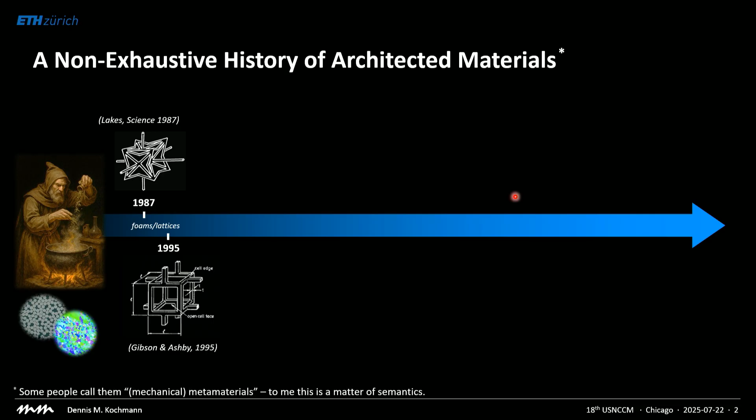But about 30 years ago, there was an interest that came up in using structure to design materials with interesting properties. One of the early examples was the design of cellular structures that have a negative Poisson's ratio. Soon after, there was a lot of work in foams and lattices using structure to give interesting effective properties at the macroscopic material scale. And then something interesting happened, and that is manufacturing took over.

All of a sudden, advanced manufacturing and 3D printing enabled everyone to produce pretty much whatever structure you want. And now, all of a sudden, manufacturing was in the driver's seat to make interesting structures that buckle, that compress, that actuate, that do all kinds of things. Soon after, miniaturization set in. With the advent of two-photon lithography, you could make structures smaller and smaller. You could go to interesting new behavior, pentamode materials that behave like a fluid with almost no shear stiffness.

You can make hierarchical structures. You can make structures across many different scales, designing them from nano to macro. And this continues until today. And so in this case, manufacturing has enabled our community of mechanics and materials to produce all kinds of interesting small-scale structures. Why does this matter?

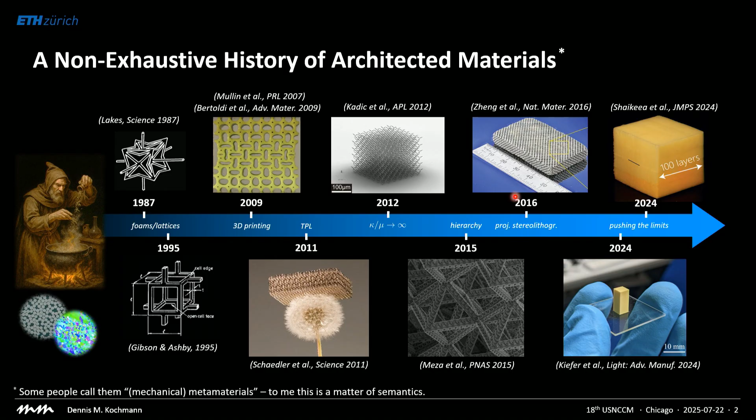Well, if you think about classical materials, they get their properties from composition and microstructure, and we all know exactly how this works. And so if you test these materials, you get properties, stress-strain behavior, or effective elastic properties, elastic surface in different directions. And what we as engineers, as scientists, try to understand is the structure-property relationship. And this, many of us do on a daily basis.

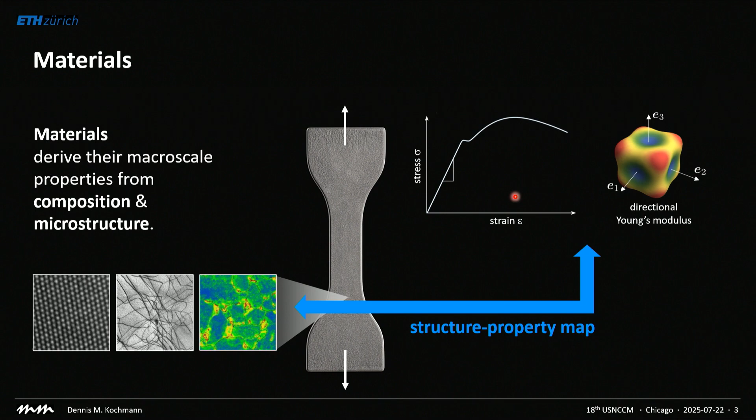There's nothing fancy here. When you turn to architected materials, you introduce one more level. And this level in the middle has structure. And so this structure is literally a structure, which means if you zoom in, you find plates, beams, shells, something that we can describe with structural mechanics. And all of a sudden, the main relation that we're trying to understand is how to go from this structure to the macroscopic properties.

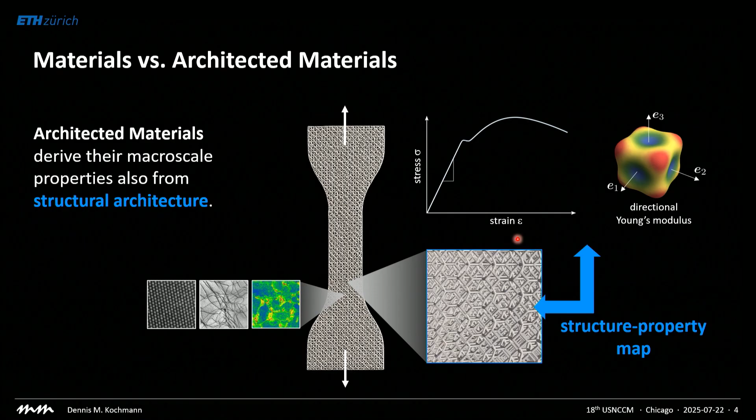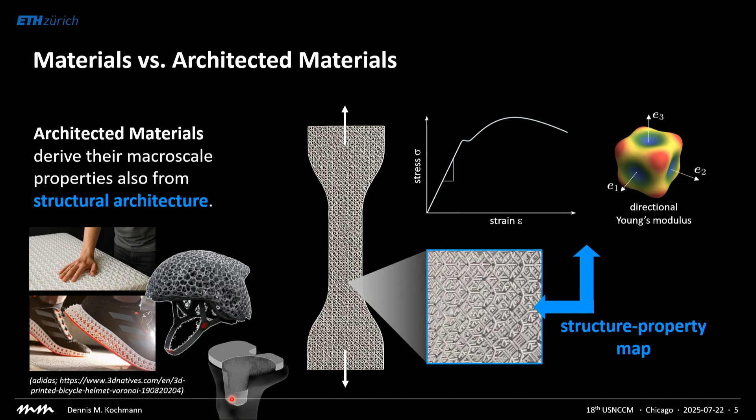Of course, the whole thing is still made out of an actual material by the end of the day. But once you know the base material properties, and these we can characterize relatively easily based on dog bone specimens, it's a structure that determines the ultimate properties. And this is what we're trying to understand. Of course, this happens not only at the smallest scale, you can also use this across scales. There are mattresses nowadays, there are fancy shoe soles, personal gear, bone implants, whatnot. All of these use structure to give you the properties that you need and you want in engineering applications.

So why is this interesting for us as a computational mechanics community? Let's try to put the second C into the USNCCM, we're the computational mechanics crowd. On the one hand, there's a huge challenge that tries to understand what I call the forward challenge, which is, given a certain microstructure, what are the effective properties? And this is something we can try to cover and to cope with our classical computational techniques, trying to understand what the properties are. The second challenge goes the other way around.

And the second challenge tries to understand the inverse, which means if you come to me with a certain set of properties that you want, or a combination of properties, how do we make structures that have exactly those properties? And I would argue the second challenge is even much harder than the first, and I will explain why. We as a computational mechanics community, of course, have a huge set of tools that we can use here, both for the forward and the inverse. And I'd like to talk in the next 35 minutes or so about these two challenges. And I'll start with the forward challenge. Given a structure, what are the properties?

Of course, this is not new. This is something we've been doing for decades, modeling structures, understanding properties. Sometimes it turns out that some of the techniques we have can actually be applied here much more efficiently than elsewhere. And I'll give you a simple example. Homogenization by FE square has been around since the beginning of the 2000s. And FE square is something that's relatively simple. You solve a macroscale problem with finite elements, and whenever you need a constitutive response, you solve a nested microscale problem and you pass information back and forth.

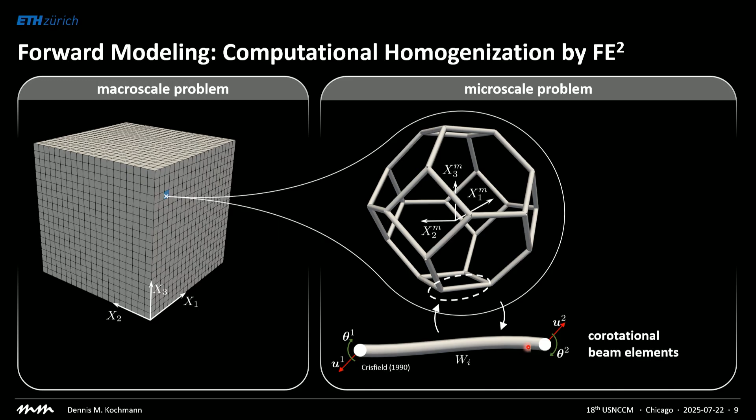It's a great technique, but hardly anyone uses this. Why? Because it's extremely expensive. This is expensive from an execution point of view and also from a storage point of view. But if you talk about architected materials like these ones, it all of a sudden becomes feasible. On the macro scale, what we have is a macroscopic structure simulated by finite elements. On the small scale, I have a structure, which I can simulate, for example, by nonlinear beams. And now you can do FE square, but the nice thing is down here, especially when considering periodicity, you have a very small number of degrees of freedom, and this makes it readily available.

So what we do now is if the macro scale deforms, and this is described, for example, by a displacement field, and we also throw in a rotation field, I'll explain why in a second, you pass those and the gradients down to the small scale, you deform the unit cell accordingly, and then, using periodic boundary conditions, you figure out what is, for example, the strain energy density in elasticity. If it's inelastic, you use an incremental potential. We can differentiate this energy with respect to whatever we pass down. This we pass back as the stresses. We can even compute a consistent tangent.

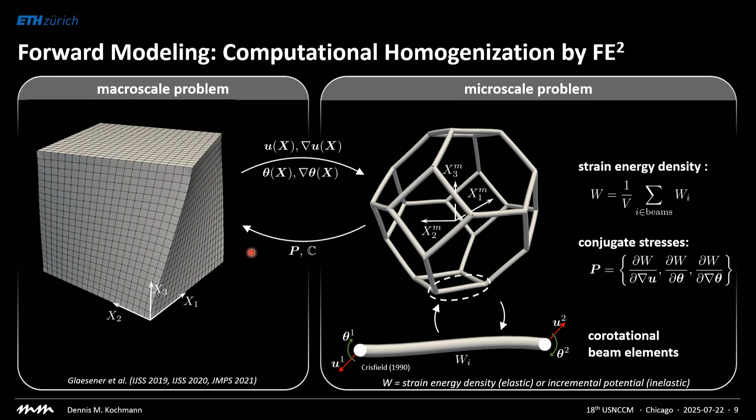But this is feasible. It's relatively easy because the number of degrees of freedom on the small scale is so low compared to what we have if you mesh and actually solve an RVE. So this can be used instead of simulating a truss that has millions of beam elements and takes hours to compute on a server. You can run this in a few minutes on a laptop based on FE square. And this works, of course, not just for show and tell, but this also works for actual problems.

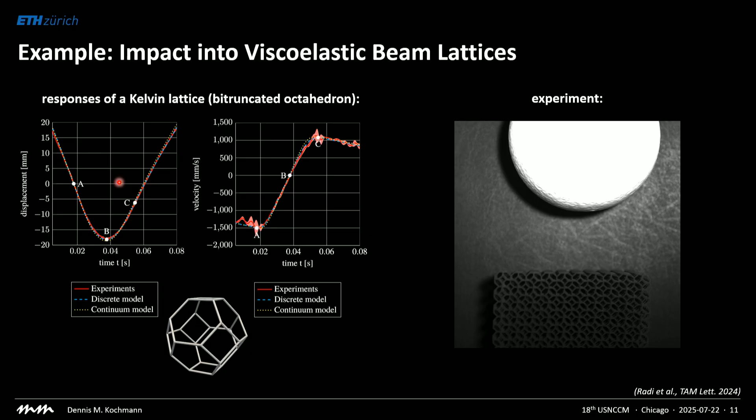Of course, homogenization doesn't work everywhere. If you have the case of failure, of localization, of inelasticity, in these cases I cannot homogenize anymore, it just doesn't work. Another almost trivial example is fracture. Fracture mechanics is more than 100 years old, and we understand what happens. There's a stress concentration at the crack tip, there's a singularity typically.

We've known this forever. But the moment that you put a discrete truss underneath, this doesn't work anymore, because now fracture toughness is not a continuum problem anymore. If you now apply loading remotely, and you look at the crack tip, you don't have a continuum. You don't have a singularity there because you have a discrete truss or frame. And now you have to look at which of these discrete structural members carries the maximum stress, and this determines fracture toughness.

If you want to simulate this for huge systems, especially in 3D, this becomes insanely expensive because you have to apply your loading remotely. If only we had a technique that has full resolution somewhere, but then efficiently coarse grains elsewhere. And of course, here we can borrow from atomistics, for example.

There's a technique called quasi-continuum, or QC, that was developed more than 20 years ago to have full atomistic resolution where you need it, adaptively tracking down, for example, dislocation events, but efficiently coarse graining elsewhere to gain efficiency. In atomistics, let's be honest, this is not a widely used technique because it only works at low temperature, only for crystalline solids. It has a lot of limitations. But for trusses, this works beautifully.

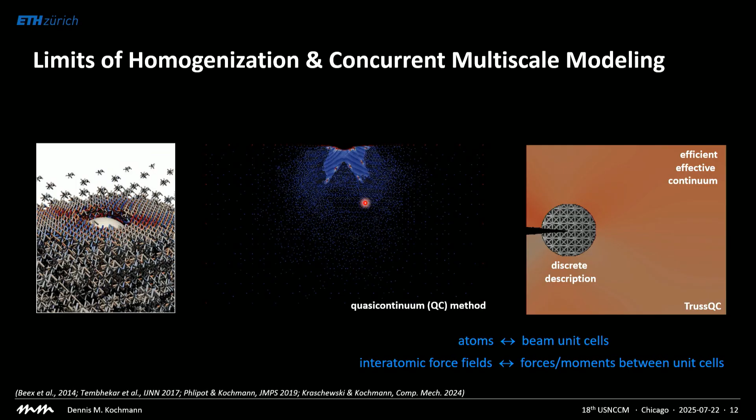So what we do is we retain full resolution at the tip. We efficiently coarse grain in a concurrent multiscale setting elsewhere. Instead of atoms, we have our beam unit cells. And instead of interatomic forces, we now have the forces and moments that are acting between these beams. And now you can coarse grain. So you have full resolution at the crack tip, and then you coarsen in many stages.

At the crack tip, every unit cell retains its degrees of freedom, and as you coarsen away, you interpolate using methods of finite elements all the degrees of freedom of a unit cell, and this allows you to tackle really large systems. Throw in adaptive remeshing. Our community knows exactly how this works.

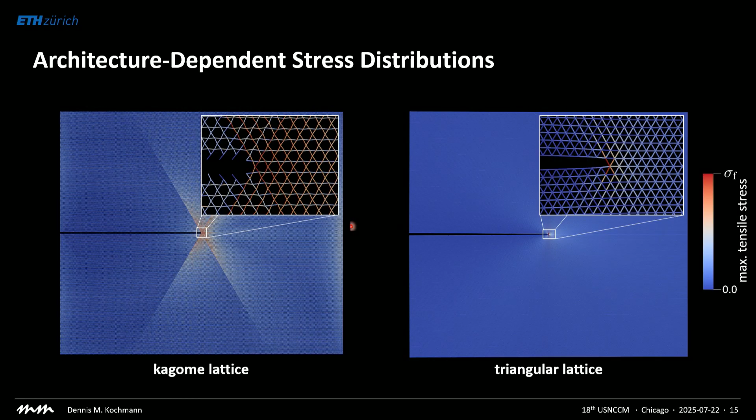Because if you zoom into the discrete solution and look at the stress distribution, the stresses are distributed very differently based on architecture. And this shows that you can use the architecture and the design to manufacture structures that have interesting fracture properties. So if you zoom in carefully, load is distributed very differently, and this gives rise to a vastly different fracture toughness of this compared to that, even though they have the same relative density, are easily manufacturable, and so forth.

You can also compare this with literature, with experiments, and we can see that with just a fraction of the degrees of freedom, we can capture the K1C fracture toughness, K2C fracture toughness, and you can even see more interesting physics. If you take the triangular lattice over here, a triangle is elastically isotropic. If you homogenize it, you get exactly the same modulus in every direction. But once you introduce a crack, that's not true anymore. All of a sudden, what matters is exactly the orientation of your crack relative to the orientation of the triangles.

All of these things we can easily figure out with computational tools. Moreover, this coarse graining allows us to do this very efficiently. So you apply your loads very remotely, but you still have full resolution and the accuracy you need at the crack tip, simply by recycling the QC technique that's been around for 25 years or so. And with this, we can actually try to understand where the properties come from. We can go the forward challenge and go from structure to properties.

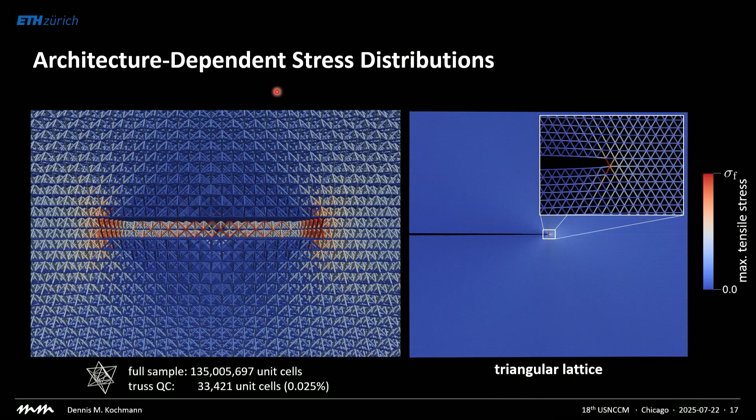You can do much more with this. I'll just give you one more example. Intertwined architected materials have become very popular in recent years.

Carlos and team actually contributed to this quite a bit. The idea here is that you don't rigidly connect structural elements, but you have loose contact between those. This can be manufactured relatively easily if you have a multi-material printer. You simply print the ligaments, and you have a sacrificial material in between, which is dissolved out. And then you have these loose contact elements.

And if you engage them, for example, in mechanical loading, they engage in contact, they engage in friction. They can give rise to very interesting properties in terms of energy absorption, in terms of multi-stage deformation mechanisms, in terms of reorganization, reconfiguration, and whatnot. This is a computational challenge that we as a community can, of course, tackle to understand the effective properties.

I don't want to talk much more about this, so I don't steal Elias Pescialli's thunder. He's talking about this on Thursday. If you're interested, feel free to attend his presentation as well.

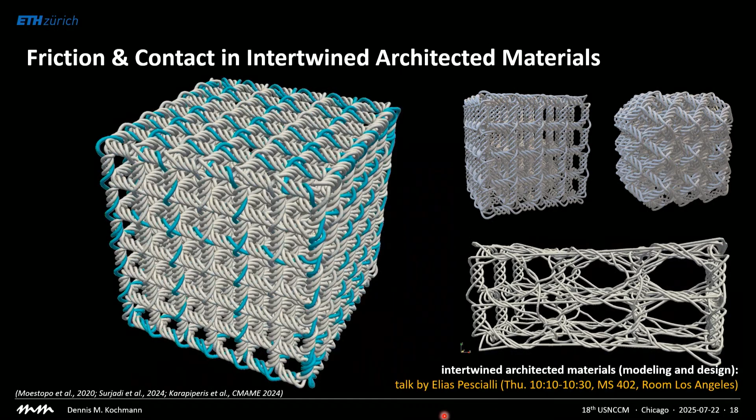So far, I've been talking a lot about modeling these architected materials. And this really is the forward challenge. And as I said in the beginning, I claim that this forward challenge is much easier than the inverse challenge. Why is that? I would say it's the case for two reasons. Number one, if you want to tackle the inverse challenge, you first of all have to have a good forward model. And this I tried to convey we have as a community. We have the tools to simulate these structures.

But the second problem is a more fundamental one, and that is the inverse problem is inherently ill-posed. If you come to me with a structure, I can uniquely figure out the properties. Of course, there's some uncertainty possibly, but you perform an experiment, you perform a simulation, you know the properties. If you come to me and you say, I want a structure that has certain properties, I can come back and give you a myriad of structures that all have the same properties. Which one do I pick? It's an ill-posed problem because there are many solutions to the given challenge that you're posing.

Of course, there are fantastic techniques to deal with this inverse challenge. One of them is topology optimization. It's a great tool. It will be a great tool. It will not be replaced, don't get me wrong. But even topology optimization, to some extent, depends on a good initial guess, because you're looking for a minimum in a multi-objective landscape. Of course, we have some of the experts in the audience on topology optimization.

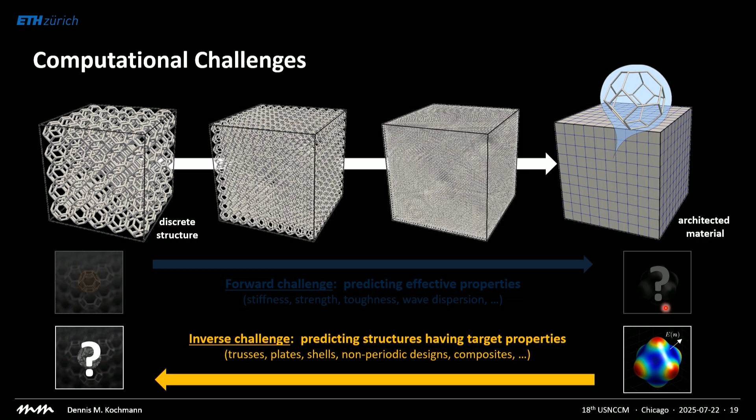What I would love to have is inverse design methods that are generative in the sense that they don't rely on a good initial guess. They don't rely on intuition or experience of the user, and that still try to explore the vast design space to give you the properties you want. How do we do this? Let me start with a very simple example.

What you see here are truss lattice unit cells. If I populate them periodically in space, this is a lattice, and I can homogenize this. I can, for example, figure out the effective stiffness. This is nothing else but the stiffness surface, which shows you Young's modulus in all directions in 3D. So this is the homogenization step, which is trivial. Anyone who can use Abaqus or FEniCS or whatever can do this in a millisecond. I mean, computation time. The coding takes longer.

The inverse challenge is harder. If you come to me and say, I want a material that has exactly these properties, what is the structure? And this is the challenge I was talking about. There's not just one, there are many structures that may have exactly those properties, and this makes it harder.

Of course, what you could do is you could generate a lookup table. This was a nice study, coincidentally, from ETH colleagues who took more than 10,000 naturally occurring structures, and they homogenized all of them. Then you create a gigantic lookup table of their anisotropic Young's moduli, shear moduli, and so forth. And now you have a database to consult. It's like in the old days, when we need a material, you go to a lookup table. You find the one that has your preferred properties, and you pick that one.

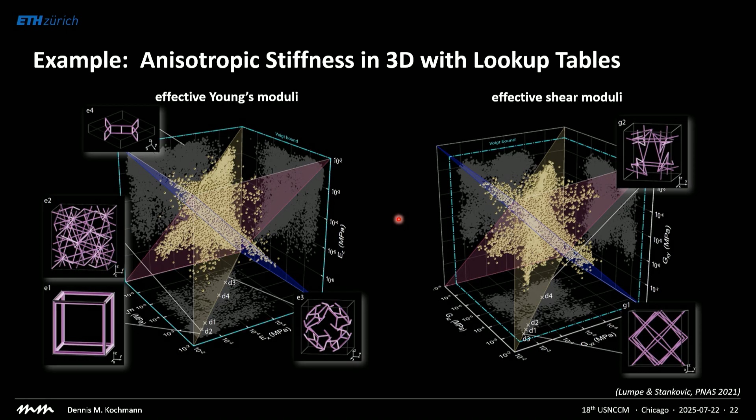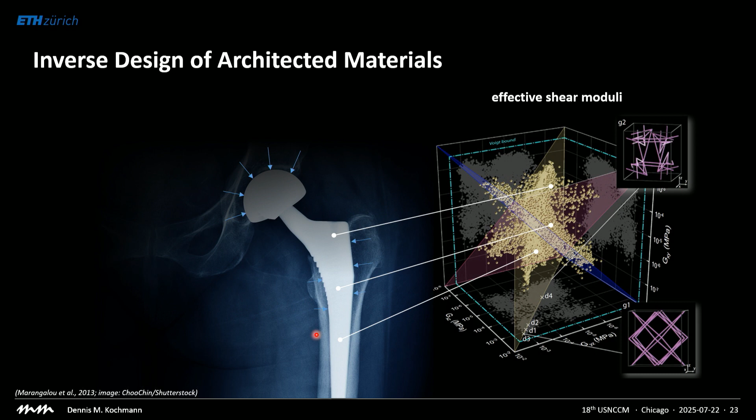But this has challenges too. So let's say you have an actual application. I was talking about bone implants in the beginning. And let's say you want to design a bone implant. So locally, you maybe know what the effective stiffness is based on properties of a human bone. But if you use a lookup table, there are a few challenges. First of all, your lookup table is limited, again, by your intuition and experience, because you started with 10,000 structures. What if you need something that's not contained in that set?

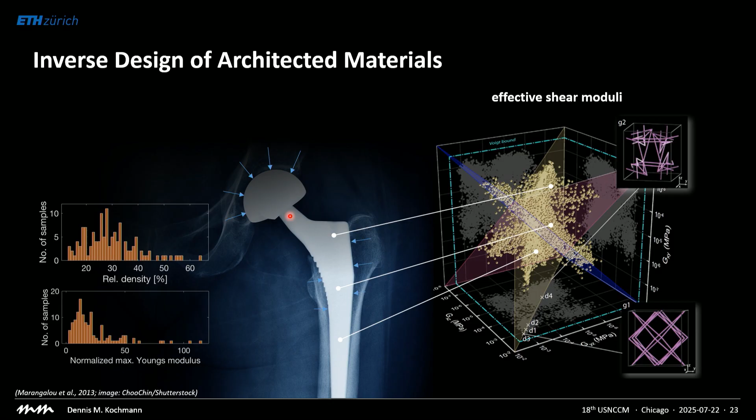And bone implants are a very hard challenge because no two bones are alike. If you poke a bone and you figure out what is the effective 3D stiffness, on two different spots in the same bone, you get different properties, and then if you go from patient to patient, it's even worse. So you really need a vast property space here. And it would be great if we had a technique that told us on the spot what certain properties are, so we can look at the vast space of relative densities, of stiffnesses that you actually find in human bone.

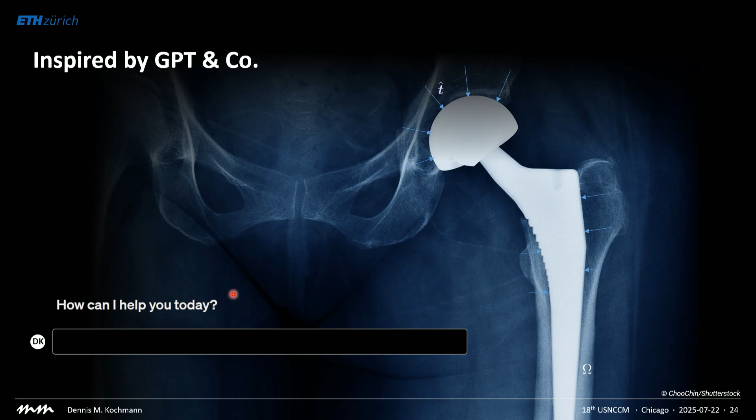And now, in the age of AI, why don't we go to GPT? It usually asks, how can I help you today? Let's say we type in, can you identify optimal metamaterial architectures for this application? And wouldn't it be nice if GPT answers, of course, here you go. And it produces structures. This, of course, is a dream, or it was a dream, because in reality, this doesn't work. Note that, of course, GPT should not know that you're talking about trusses or shells. It should just give you optimal designs. And what exactly those are is up to the framework to figure out.

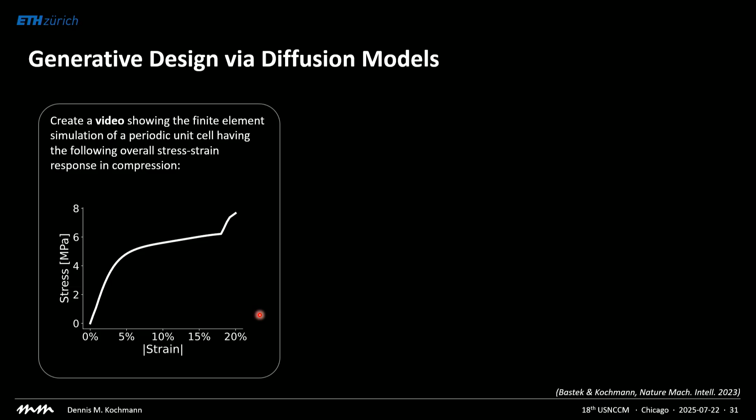And what I want is something like this to come out. I want a video that shows me the compressive response, for example, with the compressive stress highlighted in color code. And this basically kills two birds with one stone. On the one hand, I get the simulation for free, but it also shows me the structure. And that's what I wanted in the beginning. I want a generative design that tells me a structure without guessing or intuition that has exactly the response that we want. Does this work?

Well, we can use the original scheme. Every video has RGB channels, red, green, and blue. We override those with the horizontal and vertical displacement components and the stress in the vertical direction, because that's what we care about. And we can even build in physics, which is very important here. For example, I know that the sum of all sigma vertical components in any row must match the effective response, because this is the homogenized response.

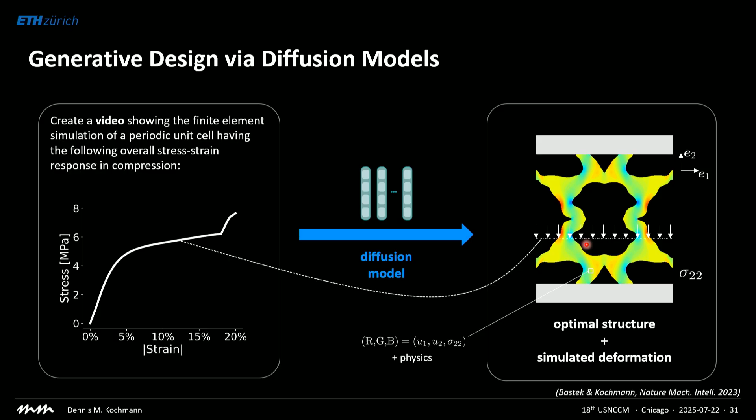I also know, if this is quasi-static, that the sum of all the vertical stresses at every single row must be the same. So I can build in physical constraints. It's not just random video generation like online, where a person can have 6 hands and 3 eyes. Here I can build in physics, and this allows me to work with much smaller data sets than what we can do online. So now we need a data set.

Here we tried something simple. We use Gaussian random fields to generate these random structures. We do a thresholding to figure out solid and void. And we mirror it twice to make them periodic. This is a 2D example. And then we simulate those. And the simulation, we tried to make it as complicated as we can.

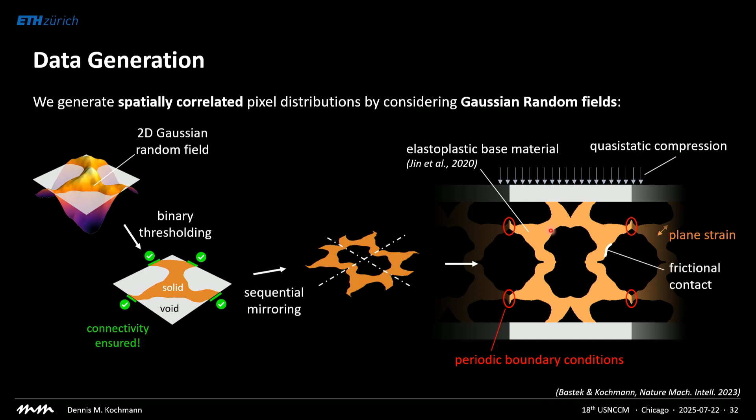This is an elastoplastic base material, including plasticity and failure, calibrated by 3D printed experiments. We introduce contact and friction, and then we simulate about 53,000 of these structures. And for every structure, we obtain a video showing the response with a color code highlighting, for example, the stresses, and we get the effective stress-strain response.

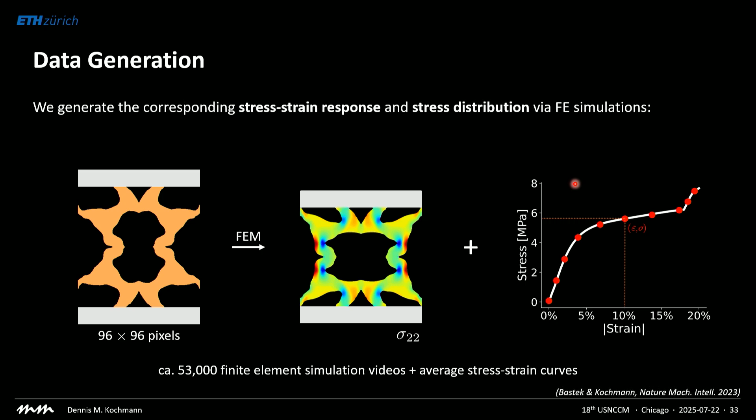What we want now is to go the other way around. To this end, we have to somehow parameterize the stress-strain curve. For example, you can pick equal strain increments and just record the stress values. And once you have these stress values, this is now my prompt. I pass this to the diffusion model, and what I want to get out is the structure on the left. That's exactly what I would like to do. So we tried this, and it turned out it works amazingly well, just with 53,000 structures.

Here's another example with pronounced softening. Again, it spits out the structure. This is our FE calculation. This is the diffusion model prediction. It has more or less exactly the stress-strain response we want.

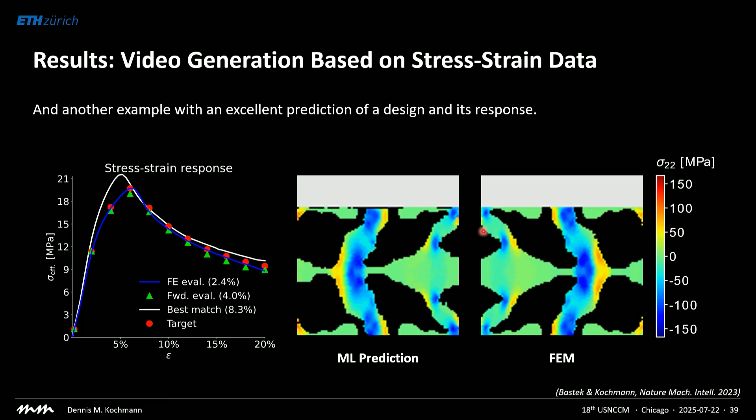What's interesting is in this buckling problem, this column can either buckle left or right. And so in principle, in the generated video, it could jump left and right and do funny things because it doesn't know the physics, but still it gets it right. So you really get a response that makes sense.

One point I would like to make is about extrapolation versus interpolation. Of course, this is only interpolating in the design space. Here we used pixels to represent the video. We have about 100 by 100 pixels, and we must interpolate there.

We just put pixels in different positions. But that does not mean that we also have to interpolate in the property space, because we can design structures that have properties far outside what we had in the training set. Here, for example, what you see in gray are all the different curves that were contained in the training set. If you now say, give me a structure that is 20% stiffer than the stiffest structure you've ever seen, it can easily do this. If you go to the opposite end and we say, give us a structure that is 20% softer than the softest structure you've ever seen, so if you notice the scale, this is really down here at the bottom, it can also do this.

And so, yes, we're interpolating in the design space because we're fixed to our pixel grid, but we can vastly extrapolate in the property space, and that's very interesting. You can generate structures with properties you have not seen before. And this can be extended in many ways.

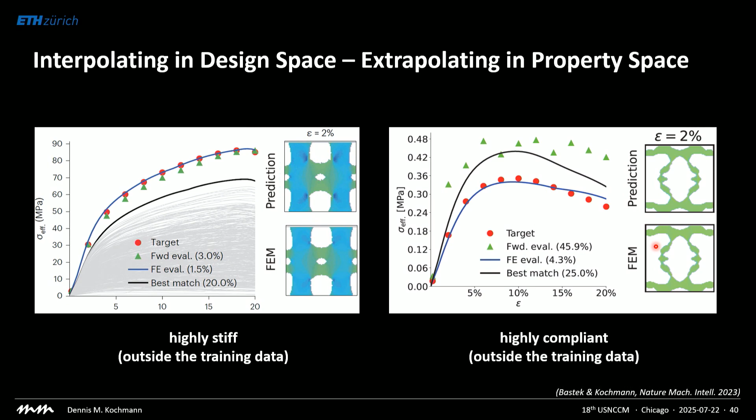So what we're doing now is we use pixel data to predict the structures. In principle, you don't have to use pixel data. If you like trusses, you could do a similar thing with a truss. In this case, we use a graph representation. Here, the node positions and the connectivity information between nodes is what we care about. What we're doing now, by the way, this preprint was just published last night, I think, if you're interested.

What has become very popular in recent years are these implicit equations, so triply periodic surfaces. What's nice about those is you can represent them very easily by one single implicit equation. All you have to do is put together a few cosines and sines. You set this to 0, and the level set of this gives you exactly those shell structures. And they're used in many applications nowadays. Now, of course, this is not pixels. This is an equation. Can we learn equations?

Turns out we can. All you have to do is turn the equation down here somehow into a vector similar to pixels that can be learned. What we do here is we use an algebraic language approach. We basically dissect the equation. Every number, every comma, every plus, every minus, every cosine and sine is like a word in our vocabulary. Each one of those is assigned a number, and based on this, we can easily translate any equation you want into a vector of numbers.

If you use a careful embedding, you can make sure that this adheres to algebraic correctness. So cosine plus sine is the same as sine plus cosine. It must know this. But we can use this to translate any equation into a vector similar to pixels. And now we're in business again. We can give it a stress-strain curve, and now we want an equation to get out, which tells us what the structure looks like. We can do even more.

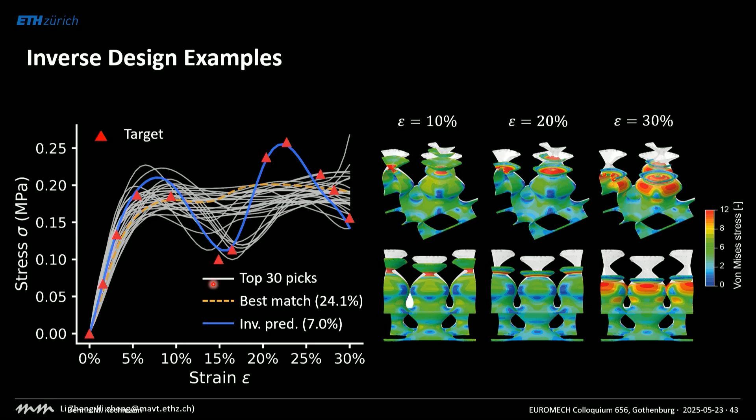Like I said, you can also do multi-objective optimization. So let's say I come and I say I want a stress-strain curve that looks like this. The best match in the training set is actually fairly close. But let's say we want a second objective. I want the structure to have a very particular Poisson's ratio so that it deforms in a certain way in the transverse directions.

We can use this to not only get the nonlinear response, but we can also use this to get the kinematics we want, so that it either enlarges in the lateral direction or it shrinks, or vice versa. And this is of great interest if you're designing, for example, shoe soles or mattresses or things like this, where you care both about the compressive response and also the kinematics of deformation.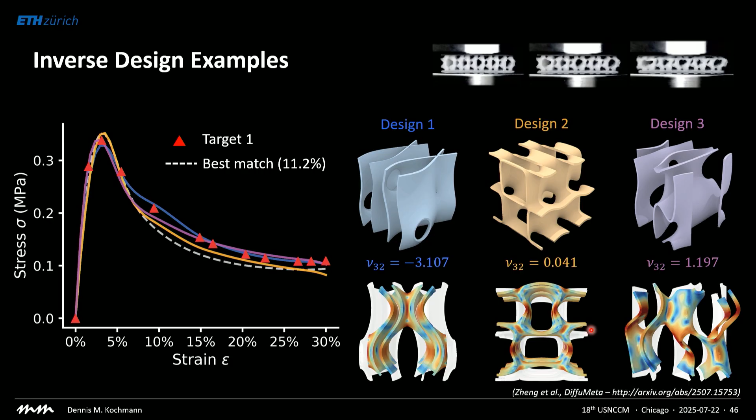I just want to show you one more example here. I mentioned the bone implants in the beginning. For bone implants, we really don't care so much about nonlinear stress-strain response. Ideally, we should never go into that regime upon loading. But we care a lot about the correct anisotropic stiffness. And for many bone examples, folks in biomechanics have characterized the anisotropic stiffness.

And here are 2 examples. This is actual trabecular bone from a cow. This is what the 3D stiffness surfaces look like. And now I use this as the input, and I generate structures that have exactly this anisotropic behavior. Here you get 2 on the left, you get 2 on the right. And so that it's not eyeballing, I'm also showing you the 3 cross-sections through the elastic surface. And they match the target super well.

What's nice is, because this is a generative AI tool, it generates not just one structure, but as many as you wish. You repeat the algorithm 10 times, and you possibly get up to 10 different structures. And then you can build in secondary constraints. Which of these 10 are easiest to produce, to manufacture, to test, whatnot. And so it really is a rich tool.

If you're very careful about the design, you can also design the unit cell so that you can spatially grade. Let's say you know it's optimal structure 1 over here, optimal structure 2 over there. How do I connect those? If you're careful with your design, you can spatially grade. So you actually have one structure on the left, one structure on the right, and you have a smooth transition from one to the other.

And these spatially graded structures are of great interest because typically in applications, you don't just want one property, but you need different properties in different spots, as I was saying at the beginning, and this way you can grade. You can even do this more complicated, but I don't have time to talk about this. You could use this as the input for multiscale topology optimization. You're trying to optimize on the macro scale. On the micro scale, you then use your optimizer to figure out what the optimal properties and the optimal structures are locally.

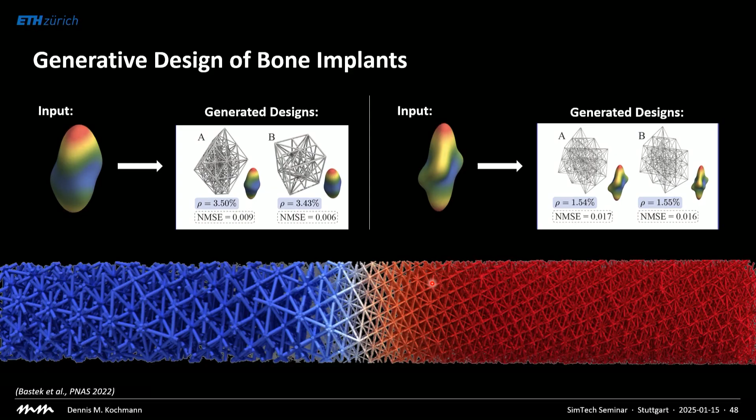So far, everything I showed you was static or quasi-static. We slowly load them, we figure out effective properties. What if we look at waves? The story becomes more complicated because now we have dynamic properties. Imagine you make a spatially graded structure, such as the one we see over here. And in this case, the unit cell changes from point to point smoothly. But let's try and make structures like this that allow us to guide waves in ways that we want.

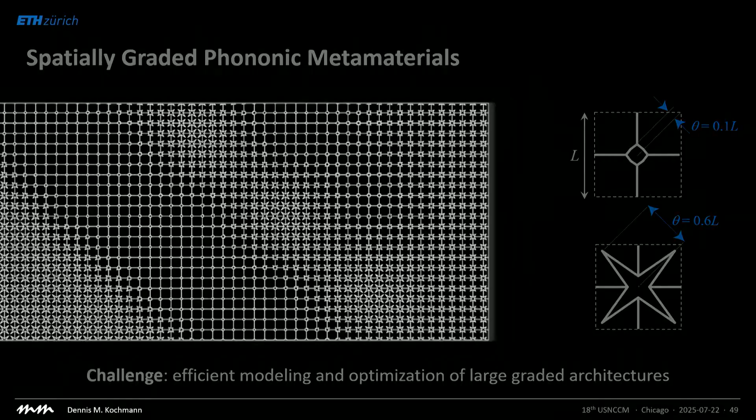And how do I do dynamic optimization? So here, we turned to actually optics, and we adopted a technique that's used there. We cannot really use transient FE calculations because it becomes a mess to optimize the dynamic response. How do you optimize wave motion using FE? What we do here is the following.

We still treat this as a somewhat homogenization problem. We assume that locally you still have a periodic medium, but that this smoothly changes from one point to the other. At every point you can still homogenize, but this is changing as you move through the lattice. In dynamics, we cannot just homogenize stiffness and density. What we typically look at are the so-called dispersion relations that tell us if you have a wave with a certain wave vector k, at what frequency does the wave propagate.

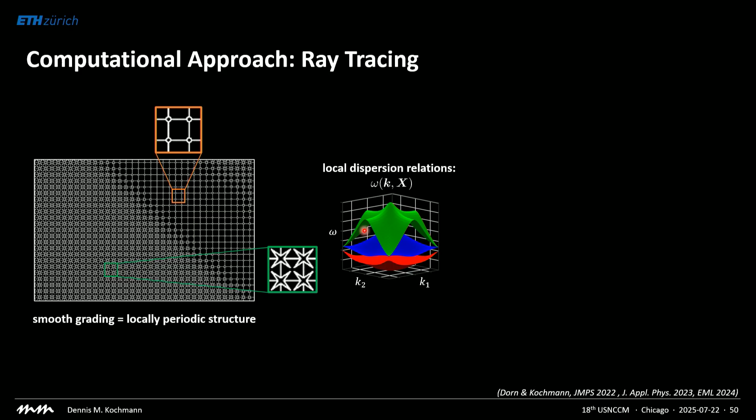And this we can determine from homogenization. It's a computational technique that every FE code can easily do nowadays. You can do this for every single point inside your medium. If I don't want to use FE, what then? We use something that's known as ray tracing and has been used in optics for a long time. We use this for dispersive metamaterials. And the idea is that you start at a certain point of excitation where you excite your lattice, and now you shoot a ray. And now you have to figure out where this ray is moving.

And for this, we have a system of equations. We have one equation that tells us the path of this ray, and this has to do with how these dispersion relations change locally. We also have an equation that tells us how the wave vector changes as you navigate through the medium. And if you consider small vibrations, the frequency is fixed. It's the one that you use as a target frequency for optimization. Speaking of optimization,

now, we shoot not just one ray, but we shoot many rays. If you excite at a certain point, waves will go everywhere. So we shoot a whole bunch of rays into space, we solve the equations, and we formulate a design optimization problem. And the idea here is, let's try to figure out my design parameter theta everywhere in space. I can interpolate it using finite elements, for example, such that I define a priori where these rays are going to end up.

Let's say I excite the structure here. I want all the rays to go through a certain point. This would be focusing. Or I want them to fan out. This would be lensing. I want them to turn around a corner. I can formulate this as an optimization problem where I try to bend the rays in ways I want, subject to the ray tracing equations. And this can be done fairly efficiently with adjoint-based optimization techniques.

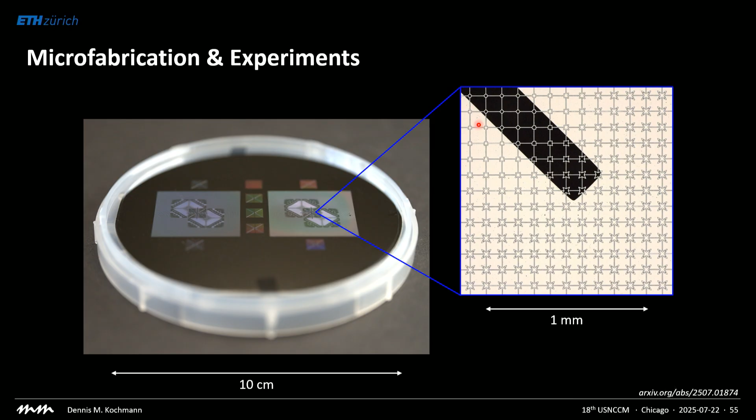So more recently, we've been using wafer-type fabrication techniques. In this case, all you do is you take a thin wafer, you pattern a structure into this. Because you use silicon wafers, this has pretty much no damping. Waves will go forever. We can make unit cells as small as a few microns. In this case, we can fit millions of unit cells onto a 2D wafer, and you can really print those designs that I just showed you, where your unit cell changes from one point to the other.

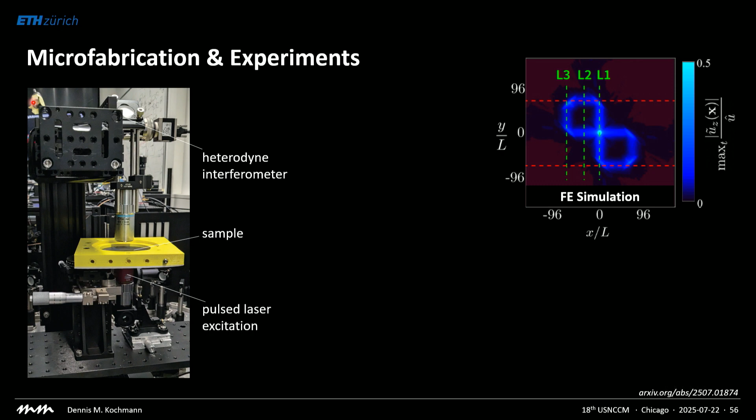And with this, we can build, we can test. This is the setup from our lab, where the sample is here in the middle. It's basically a thin silicon sheet, which you excite from below with a laser. And then we look at it with an interferometer from the top, which figures out the displacement, the out-of-plane displacement.

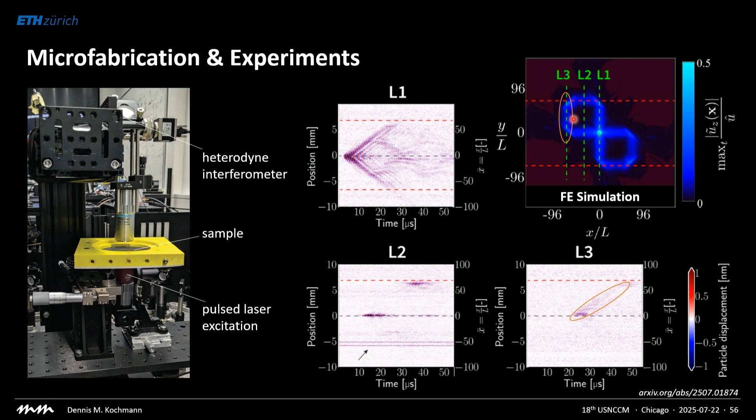And if this is the figure 8 that we simulated in the beginning, we can now do line scans. If you go around along line L1, you'll see that the wave spreads exactly until it hits this point up here, and then the wave disappears because it turns by 90 degrees. If you go along line L2, you'll figure out that nothing happens until the first wave hits here, and then the second one hits there. At L3, you see the wave arrive after a while and then keep going. So we can really scan the full space and figure out that the wave is going exactly along the range we want.

You can do this much more complicated, of course. You can do different designs. Here are just some examples of how you can put the tiles together. We also realized that this works not just at a fixed design frequency. We can do this over hundreds of kilohertz. It still works. And this opens up new opportunities for making structures that direct waves wherever you'd like, that have signal processing capability. We can make some of the low-frequency waves go left, high frequencies go right, and all these kind of things.

What I really like about this example is we've put computational mechanics back in the driver's seat. Because as I said in the beginning, manufacturing had more or less taken over, and you can make all of these small-scale structures nowadays. But now that everyone has the capabilities almost to fabricate these structures, computational mechanics really is getting more and more importance, because now the question is, what the heck do we fabricate? It shouldn't be trial and error. It should be simulation, guided design, and optimization. And that's exactly why computational mechanics is definitely back on the table and in the driver's seat.

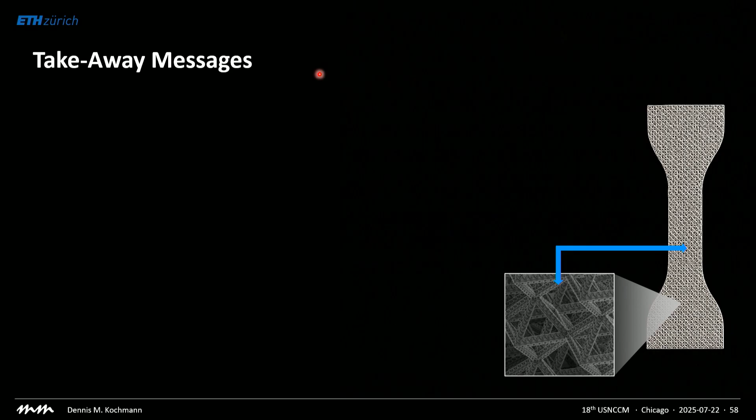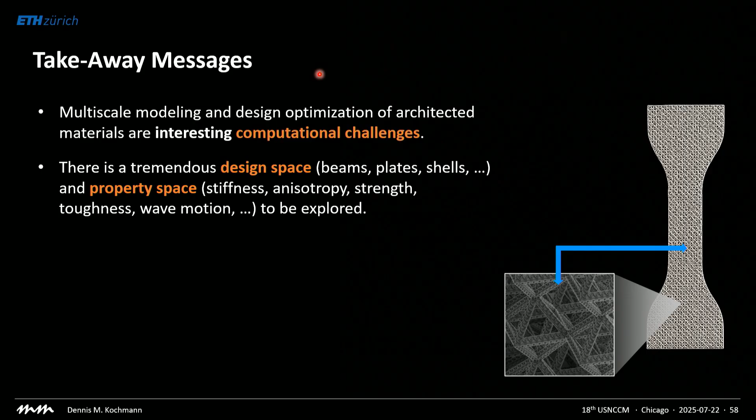Since time is running out, let me quickly summarize my takeaway messages. First of all, multiscale modeling and design optimization of architected materials are very interesting computational challenges that many should look into. There's a huge design space, there's a huge property space that can be explored. I just showed you the tip of the iceberg. There's so much more one can do.

These AI-based approaches that I showed you offer interesting alternatives, both in modeling and design, but my take is that we should combine them with physics and science. Just AI is one thing, but if you can build in the physics and the scientific principles, they're much more powerful.

And the last point, there's so much to do. I only talked about going from the middle scale to the macro scale. I completely glanced over that there's also a material scale. And we can leverage this as well. This is where small-scale fabrication really comes in and gains importance. There's actuation techniques, there's multiphysics, all the things we're hearing about in the many sessions today, all of this can be applied here as well. Anything you can fabricate, we'd have to somehow design and optimize, and this is where computation comes in.

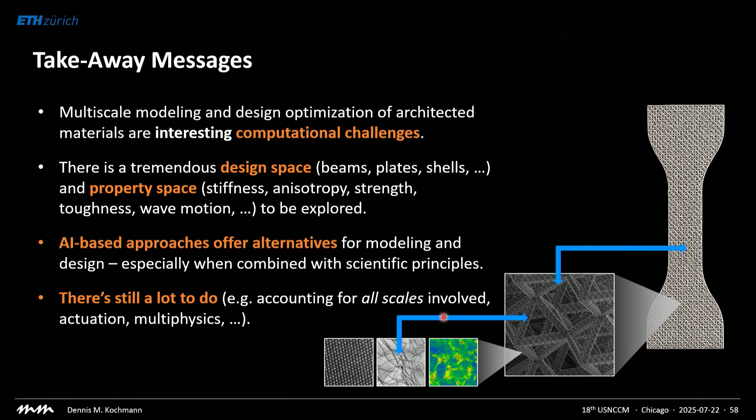Hi, Dennis. Fascinating talk. Thank you. And thanks for putting computational mechanics in the driver's seat. The question I have for you is the one that you alluded to in the beginning of your talk. How do you know that all your AI models are not hallucinating, especially for the type of problems that you are solving, especially when new physics comes in, and especially considering the evolution of these models?

So this is what I meant by, don't get me wrong, I'm not saying this is going to replace topology optimization. No. It just gives you an initial guess from which you can start, and then you could run topology optimization to give you a structure, right? It just gives you initial guesses. This is not the perfect structure by any means. So anyone who does top opt, you're not going to be out of a job for a long time, I think.